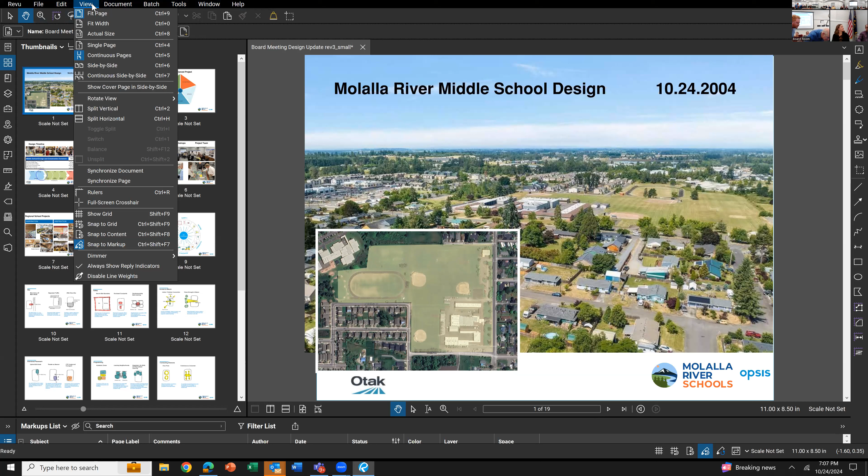And we're almost there, except it's not a presentation yet. This piece of software, sorry. Okay, let's see. View. And presentation. Hey, there it goes, it's gonna show up. Although it's all behind most of some of you, behind some of you.

Yeah, we all know where the school is, so we don't need to do that part. Okay, you want to start that off, Tony? You bet, and I'll give one more context here.

Certainly board members are aware, and most of the community probably are as well, but just to set the table: what you see in front of you are the commitments that were made in the bond language as we put the bond before the voters. That set of commitments was built on a lot of community voice that came over through the pre-bond advisory group. This language really informs the next step on our work with the architectural firm. You see safety and security, which was referenced earlier, is a top theme. Efficiency is a top theme. And of course, our primary purpose of teaching and learning, and within that, expanded learning opportunities. You'll see evidence of this work touching on all these here tonight.

I'll probably chime in at different points. We're all going to play off of each other because we've had different pieces of this, but at the end, or in between, if folks have questions, this is an open workshop, open work session. There may actually be a spot here later tonight where we're going to invite you out of your chairs too. So back to you.

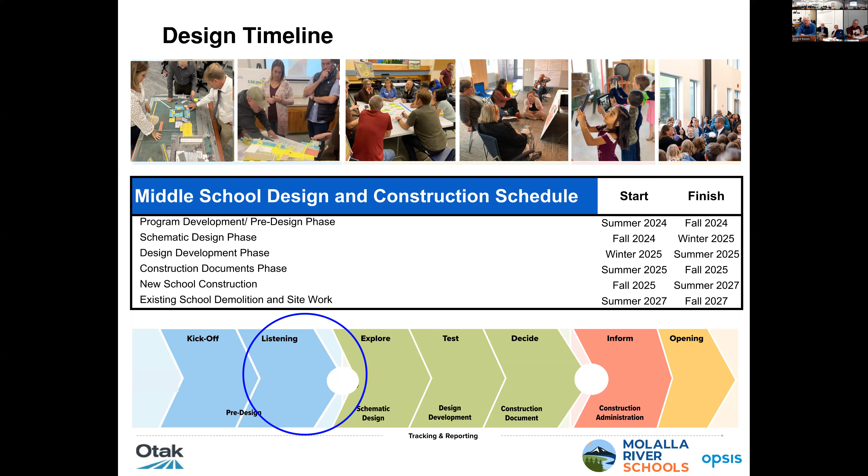Okay, that'll be noticed as a public meeting, not just public invited, so that all board members could attend. All board members can attend because it's a social event, you're not making any decisions, as long as we're not gathering a deliberating quorum to make decisions together. But do you guys all want to be there? Yeah. Just want to make sure that, you know, it likely will be most of what you're seeing. There might be a few changes, we're making progress every week, but by the 7th it'll probably be pretty much what you're seeing tonight. But it's always good to hear what everybody says.

Yes, go ahead with questions. I have one other quick question on your floor plan here. I'm just wondering about the black spot that appears here. That is a wheelchair space. Really? Yeah, so if you look really closely, every classroom has to have an ADA space, which in some cases has a different height or adjustable height table, or maybe a little wider, so we have to account for those things.

Incorporate that into the plan, that's what it is, good observation. And you're accounting for obviously possible growth.

That's part of the reason we have to take each room, put each chair in, each desk, so that we can actually work with Randy to say, okay, we have so many periods, how many classrooms do we give? We have 700 students, how many seats do we need in each grade? It's a big mathematical formula, it's actually quite interesting, because then you have the electives that happen.

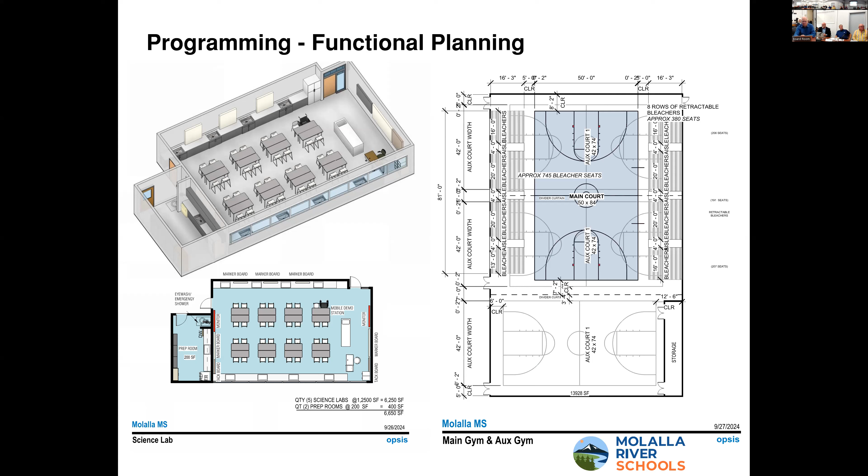So what does this process look like? It's right here in this room at the top. It's been very hands-on with this group, again, very intensive work. Even moving pieces around on a board to say, what if the classrooms were here? Where should the gym be in relation to, as Tony said, to get public access after hours? So again, every week we've been doing this work, and you're going to see a lot of the results of that here today.

Part of that is just trying to look beyond what you have, which is old. So part of that is we've been bringing examples of other schools around the area to see what are the possibilities in these different schools, what kinds of spaces are there, how are spaces changing over time. Since the original middle school, things are a lot different, libraries are different, cafeterias are now commons where there's more things going on than just eating food. So that's been part of this process to really understand what is a contemporary middle school look like.

And then Tony, why don't you talk a little bit about the tours that have happened?

So as Alex said, we've had the opportunity to visit and walk through schools and get a sense of nuts and bolts things. For example, what does the flow of traffic look like as kids are headed to lunch? Where are kids going to line up, and how many queuing lines are going to feed out to a point of sale? How does it fit within the cafeteria?

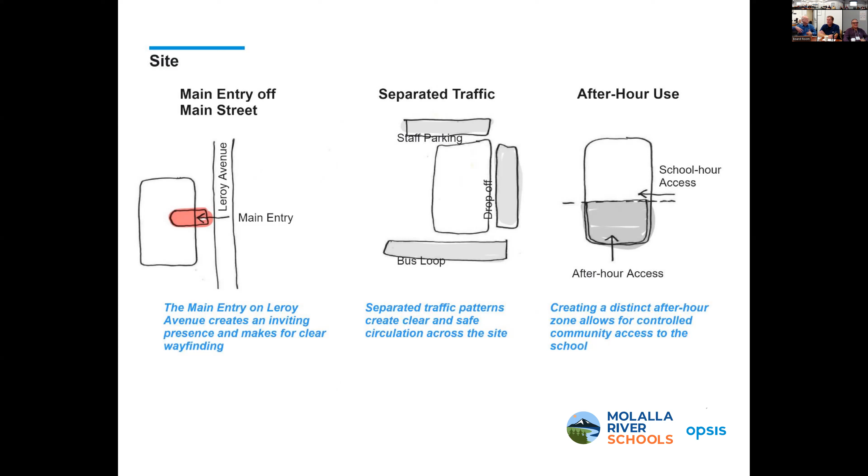That's why you really need to make sure the restrooms are in a secure area with the gym, because I've seen so many situations where we've got the whole gym secured, but then kids need to go to the bathroom, so we open up the doors to the hall and the whole security setup goes crazy.

So we need to determine, and this is a minor thing but still security related, how much do we fence around the school, and how do we provide good visibility? Right now there are all sorts of ins and outs with people driving through the middle of the school. So we're going to look at the whole site and hold a security workshop with a consultant who specializes in school security, along with our security technology folks, to look at overall security and the edges of the site.

One of the things we're looking at heavily in these concepts are enclosed courtyards. That allows certain activities to happen without letting kids wander off. We're looking at a concept, which you'll see a bit later, where we have CTE connected to a closed courtyard where students can go out and build something.

For instance, right now there's a game room being built. The construction project students are building it out in the area where the two covered play areas are, but it's open to the public—you can walk out there right now. Having a secure space for CTE to go out and build something and leave it there is a real benefit. So secure courtyards can be a real benefit to the school, and they bring natural light into the center of the school.

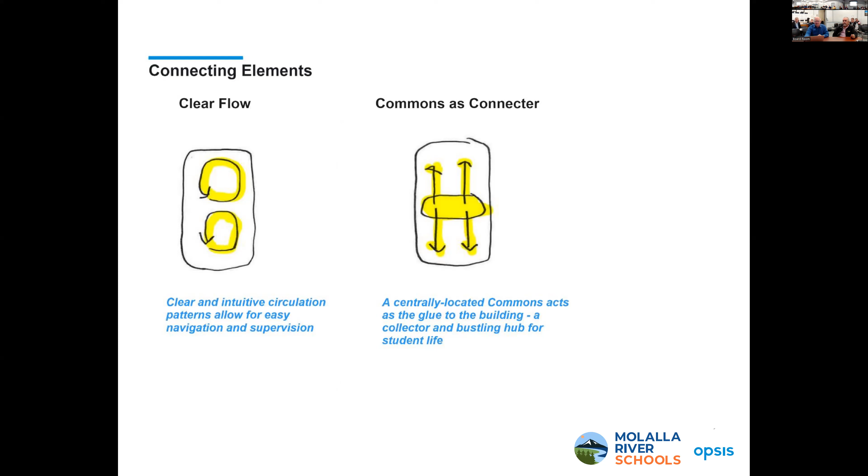Wow, that was your deep dive learning into the kind of stuff that we're dealing with.

Then we got to figure out how to put all of that together. That's been the fun part - probably in the last 3 or 4 weeks we've been working through a whole bunch of different ways of taking these neighborhoods and things like the library and the commons, the courtyards, and how they all get together. I can go into detail, but I can tell you we've come up with a number of different versions. We've spent time looking at different circulation paths - some that had more wings, some that had more loops, some with all sorts of different configurations.

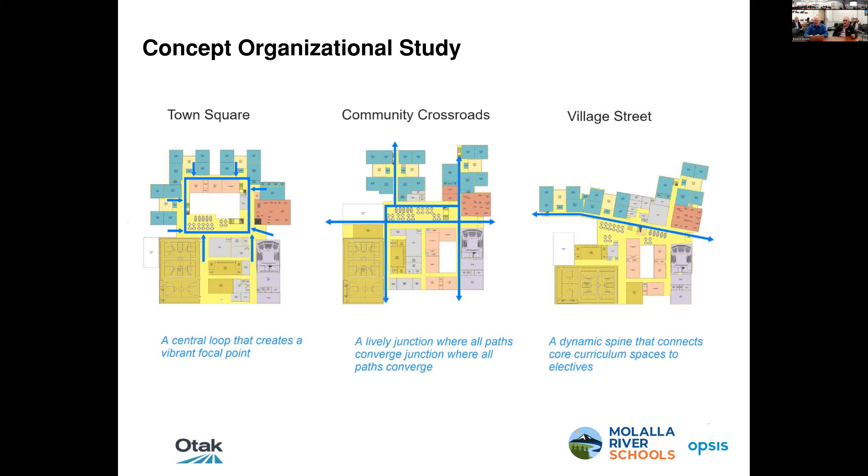What we've ended up doing is trying to look at those in terms of the site itself. How big is the school? You can see the existing school at the bottom of the page there and the new school - they take up a similar amount of square footage. But part of that too, you've got a lot of play areas and parking and everything in the middle of the building. So it's a little bit more compact, but it does take up most of the field directly north of the school itself.

And then we have all these other issues with parking, field use, everything else coming into play. So we have to work all the way from that desk in the science lab on one side to bus loops and everything. It's from biggest scale to smallest scale simultaneously to find that.

Has it been discussed about shrinking the footprint by building up? So we are definitely doing 2 floors for the academic areas. Otherwise the school would just get too large on the site. And here's the deal.

Once we bring all the buses onto the site, that takes up a fair amount of space. We don't want to lose much field space. So the compromise is - when we bring the buses in, how do we not lose field space? We have to take some of the classrooms and move them to the second floor. It's also more efficient construction for us to have, particularly the classrooms, in a 2-floor area. Other spaces - CTE, music - we don't abandon those, they're taller spaces. We don't want any classrooms above those. Obviously the gym too. So basically the classrooms we stack, all the other spaces we can put on.

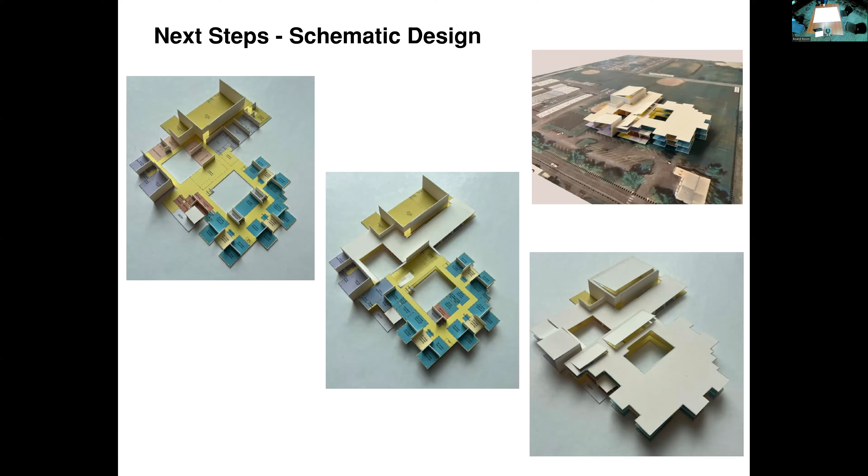Get this the right way. Okay, it's backwards, but that's okay. Depends on which way is north. I'm dyslexic, so it's good. Let's orient everyone. Daniel, could you enlarge the camera view on the table, please?

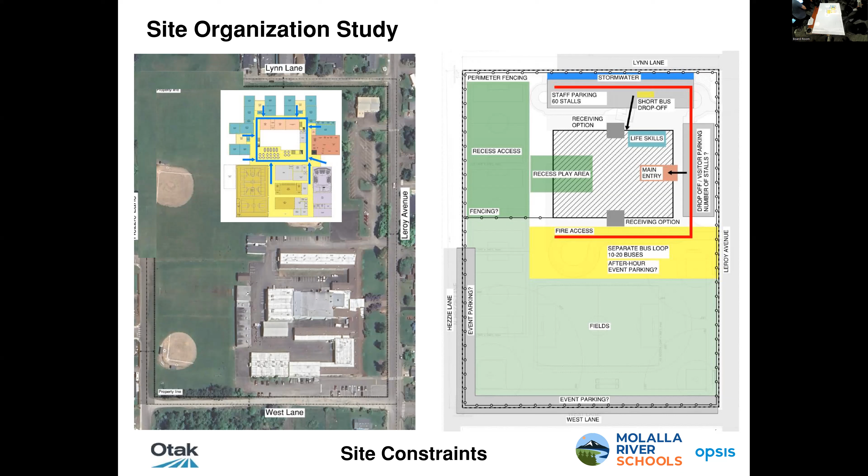Can you see it? Bob, do you see it? You want to stop sharing their screen? Please, thank you. I think you can see this. I was wondering, do you want me to just put on the profile with him? That would work too. Or do we need to stand and be out of his way to see this?

The camera's there, that's it. Right? Okay. But we can also take the phone and bring it closer. Go ahead and share, if you go on to the Zoom you can hit share. Let me do it, let's flip this around so it's going to be a double decker. Okay, so...

Okay, I'm on Leroy here. Main Street's two blocks that way. This is coming up here, we've got Lynn Lane. The existing school is sitting right here. So what we need to do in this process is bring buses in, loop them out, and come out. We think it's probably going to be here in the middle of the site, but we don't know for sure at this point.

We're looking at buses coming in, looping in and coming out. We're looking at some kind of staff parking, and a drop off where you'd come in, drop off, visitor parking, and go back out. We're trying to separate the distance between where buses are coming in and out of the site off Leroy, and where cars are coming, so they might line up this way or here. Then we're trying to preserve as much field space as possible around the school. What you find out quickly is when you put all those things together, what seems like a giant site gets small.

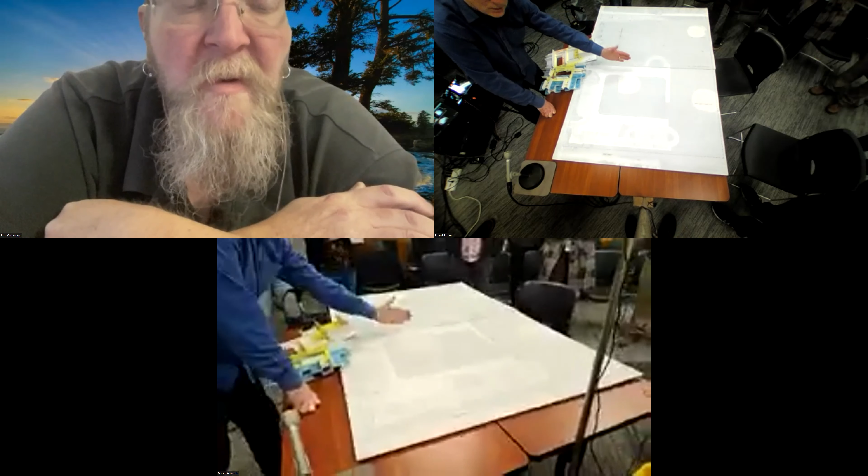We also have a very clear line, right about here, which is the existing building. We can't build there, obviously, since we're leaving that building operational while we're building this. So everything south of that has to stay as it is until we get this built over that summer. Then we can tear that building down and build the bus loop and build those fields.

Are these right here walkways, like sidewalks? Not really, not even yet, we're a little too early. You can see this doesn't actually fit on here because the bus loop has to move. This is in-process work, but it gives you an idea of something we've been thinking a lot about.

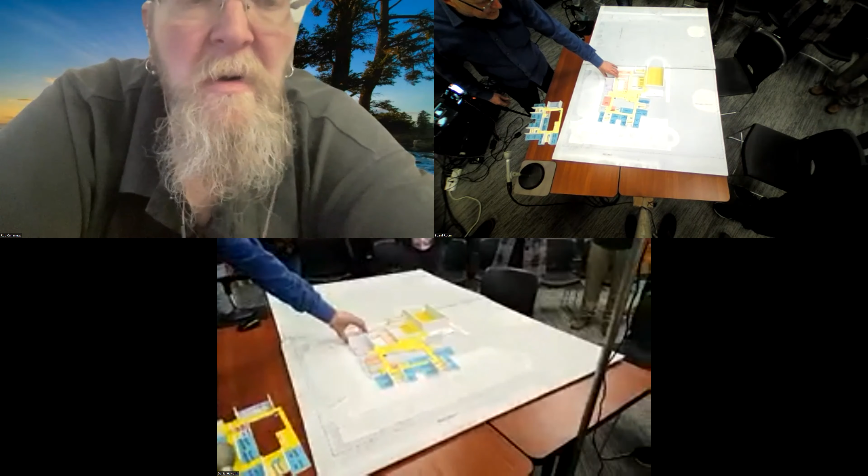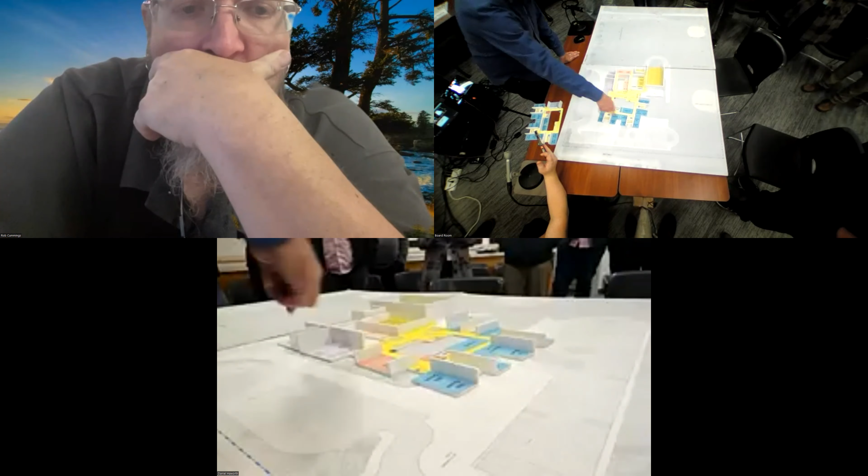If you were coming from Leroy here, this would be the entry. One of the things we talked about is, can you look straight out to the west toward the track and the elementary school and across the fields? That's where this commons would be, in the center. You can see this idea of a loop here, it's really a double loop, almost like a figure eight. Anywhere you go here, you can loop around without hitting a dead end.

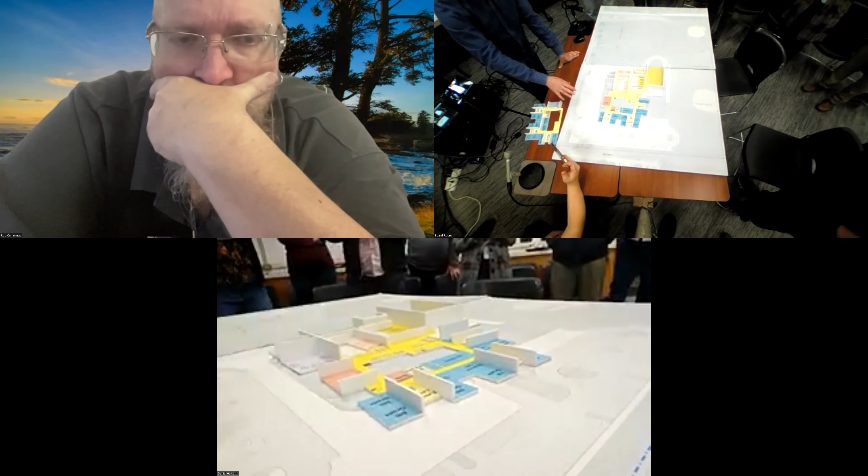In this program we have the theater and music up front, administration at the front door. That's standard practice, a secure vestibule. Then we have these neighborhoods: neighborhood 1, neighborhood 2, neighborhood 3. We have life skills here in the center. In this scheme we have two courtyards, a kind of lunch courtyard and then a CTE courtyard, so this might be where kids are building things.

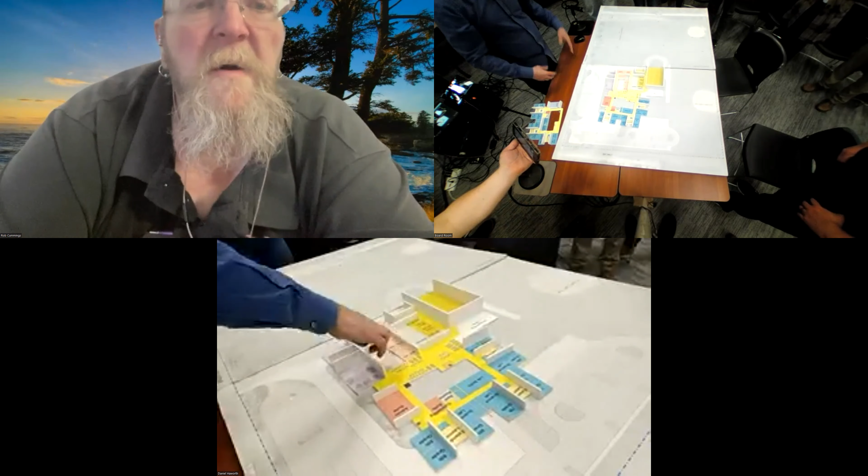They might be doing robotics out in the courtyard, or 3D art. We've done a school where we have ceramics and a glass garage door, so you go out there and do some sculpture or whatever you're doing in art, out in that courtyard. This would be more like a lunch courtyard, with some tables out there, again secure, not students out there unsupervised. Then this would be active playground space outside the building.

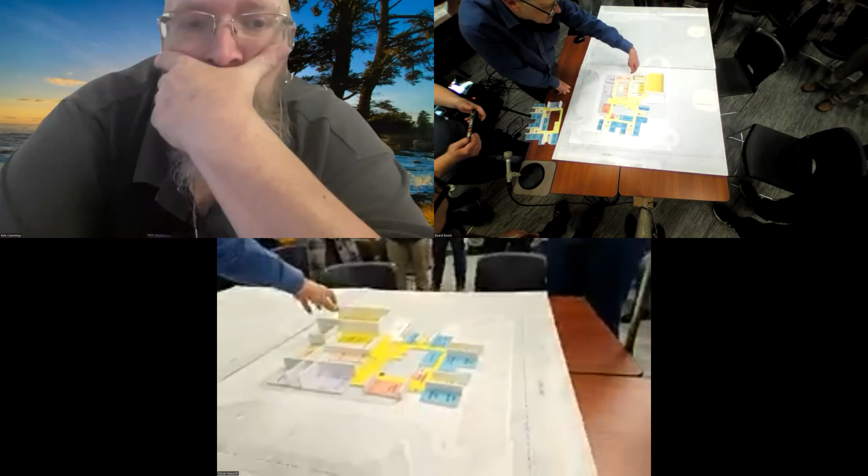In this version, you can see that if we did have a drop off — let's assume it's placed a little differently on the site — you might have a separate entry here for the gym. We could close the building off here and here, and you'd have the restrooms, the locker rooms, the gym, and an entry.

That would be the smallest and most secure zone. So you could come in and we'd probably put some parking in here. After hours, you could park. If a team was coming for some kind of event, they could bring a bus in here. You could actually get in and use this gym without getting into the rest of the school.

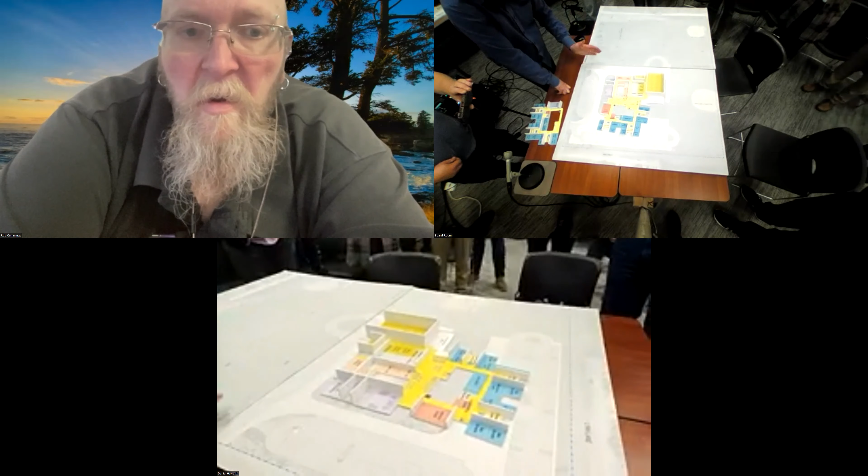The next secure level, when you talk about where that might be, is you might then have some doors here and here. So you can say, well, we're going to do an event in the theater. We're going to leave the main lobby open, we're going to let the gym be open, then we could secure this area off from the classrooms. So these layers of security are really important to think about so that we don't have to open the whole building up.

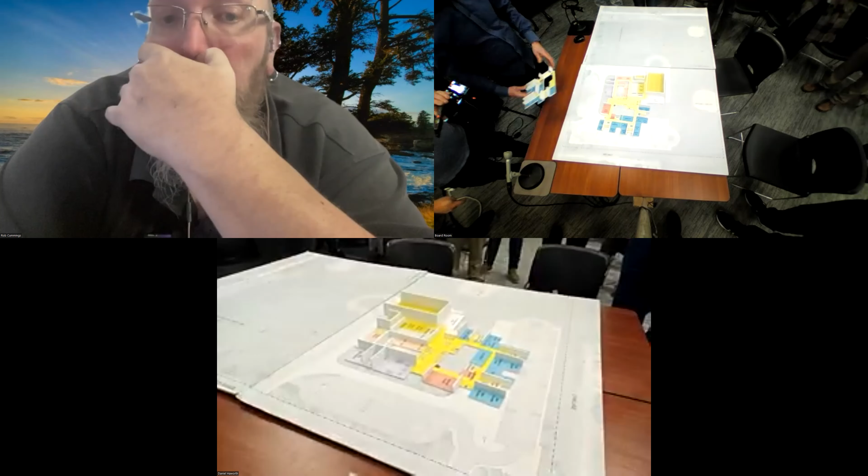Then you can see looking at a second floor here, so I get this right, again those neighborhoods stack on top of each other. And you can start to see how this common space works.

One of the things we talk a lot about is where could Randy stand in the morning? Like right here, you're coming in the door, he could be there. And a lot of our principals we work with over and over again say that's one of the best things of the design we work on. Where can I stand and see the whole school? Where can I feel like I can see everybody coming and going? And where is that happening? It could happen inside the door.

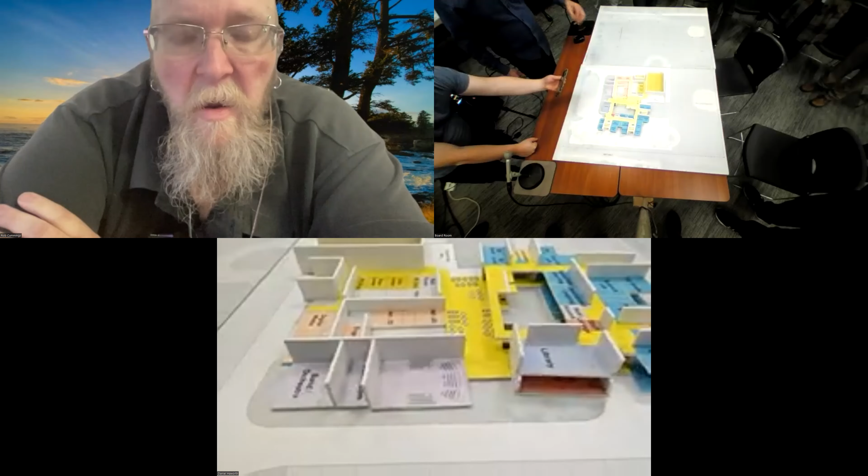You can view the neighborhoods, you can view the CTE out toward the play area and have a sense of everything, which is completely opposite of what he has right now, which is I have no idea what's going on beyond down on those wings. Those wings are out there somewhere else, you've got to be moving through the building.

And so this is where we're kind of at right now. It's a concept, it's still very conceptual, but I think everybody's pretty excited about the way it's working. We're starting to sit on the site and kind of look at some of the concepts about how the pieces come together. So with that, I'm going to stop talking and let you guys ask questions, poke your head in.

If you want to, you can also get down. I do have some roofs to put on it, but they're really just preliminary. We don't really know what the building looks like or what the roofs are.

Just notice that you've got each grade on both floors. Actually, we labeled them that way, and I've been meaning to actually take that off, because it could be that this is sixth grade and sixth grade, and then seventh and seventh, and eighth and eighth. I don't advocate for one or the other, it's just interesting.

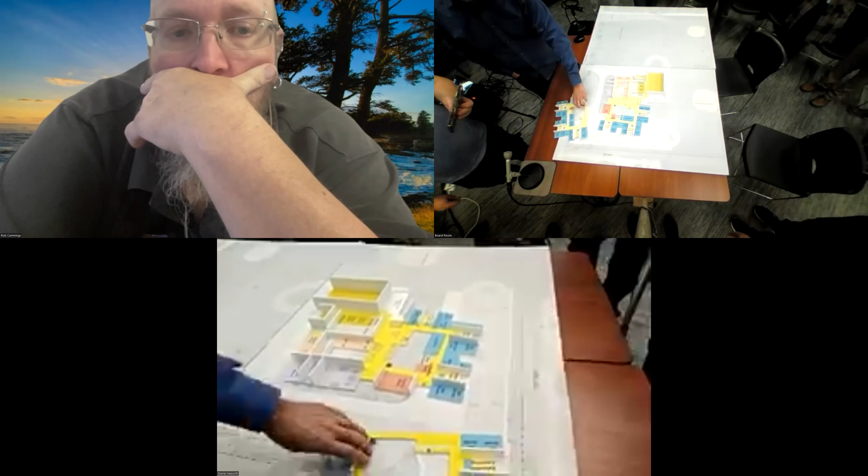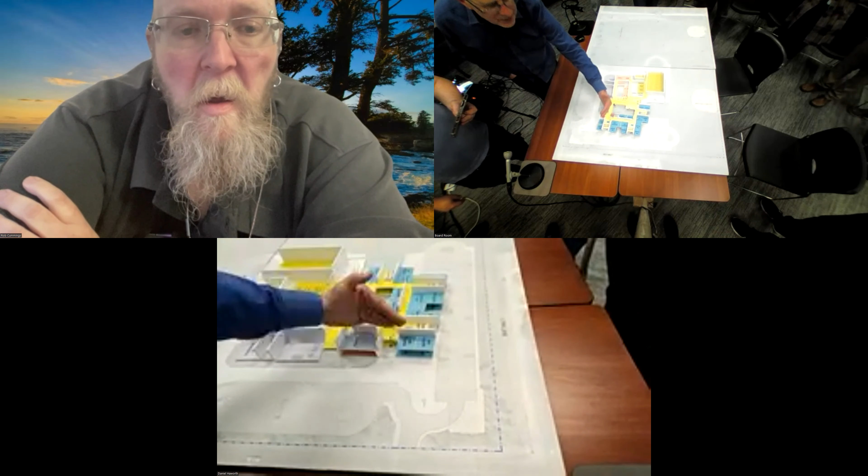Is there a reason for them to stack vertically so they're really close? This idea is that sixth grade is here on 2 floors, and then this is seventh and eighth. So kind of this side is sixth grade on 2 floors, and there's a stairway right here.

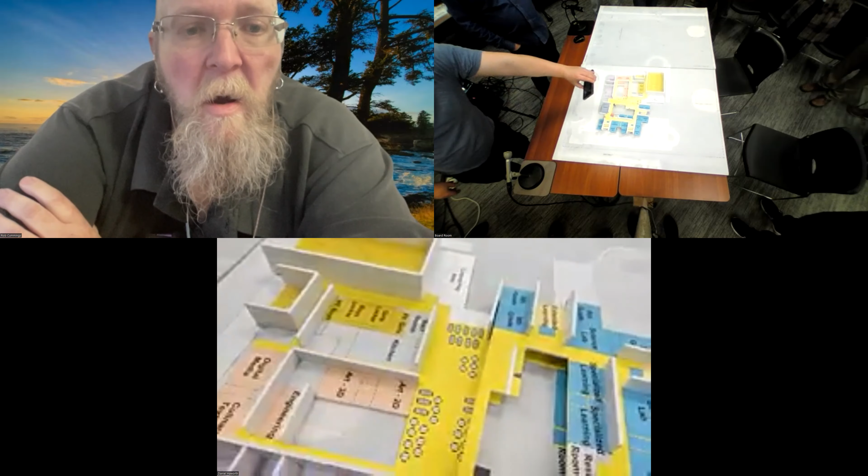One of the things the loop circulation does for us is address a little intricacy of school planning. You'd like to think that every grade is the same number of students, but it isn't. The population goes up and down depending on your grade level and your enrollment. So some grades are going to have, potentially at some point you could hit an enrollment growth where all of a sudden you need one more classroom. When you have wings, that's a little bit of a problem, because all of a sudden you need a sixth grade classroom in the seventh grade wing, which is outside and around.

So that's one of the advantages of the loop, is you just go one more classroom over, and one of those classrooms could become a sixth grade classroom. And then as that bump of school population moves through, that could move back to a seventh grade or eighth grade classroom.

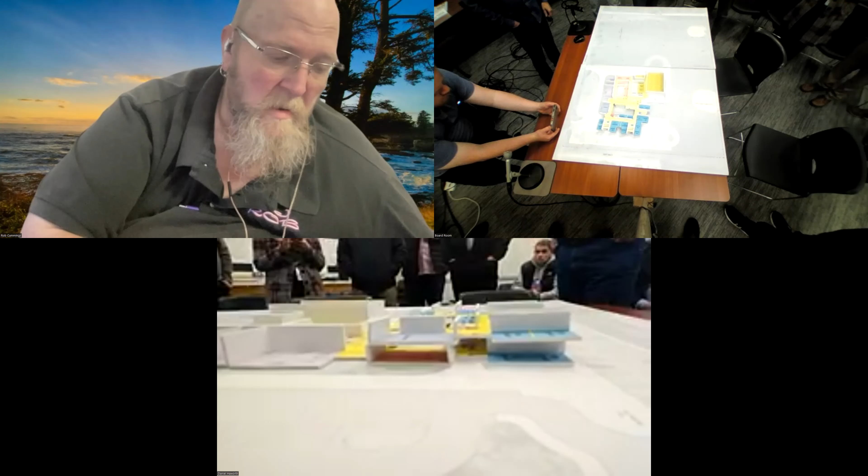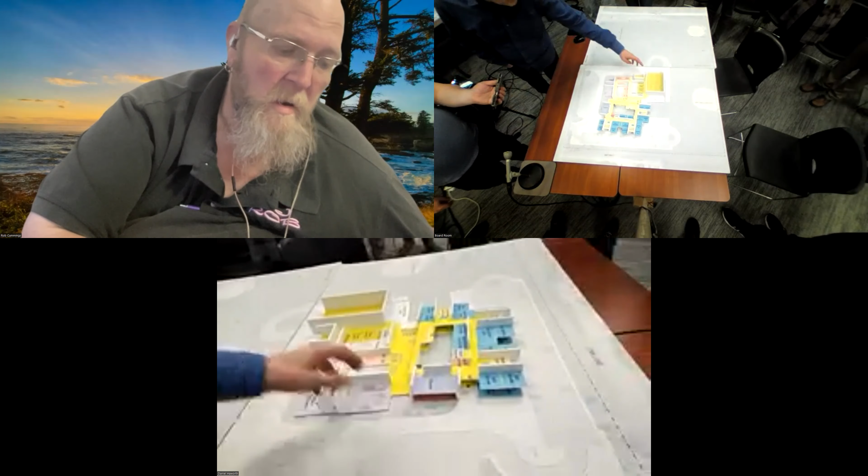So for the entrances, there would be one gym entrance here at the main entry, and then this would be more of an exit out to the playground. And there might then be a staff entry off the staff parking lot that would be just a secure sort of back door card-swipe kind of entry for staff. But really trying to get it hopefully to 2, if not 3 main entries, so there's a limited number of secure points.

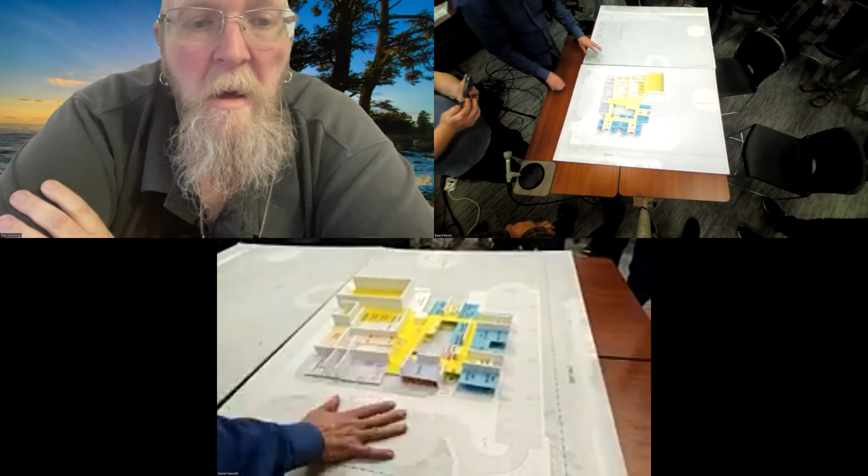So I have a question about the parking. Your biggest parking lot is over here, and I understand that's staff parking, but what goes on in the evening when you've got events here and here? There's probably gonna be more parking, it's not shown yet. Imagine at least this lot probably here. One version would be you actually run the bus loop around a parking lot, which is often done, but we haven't really gotten that far.

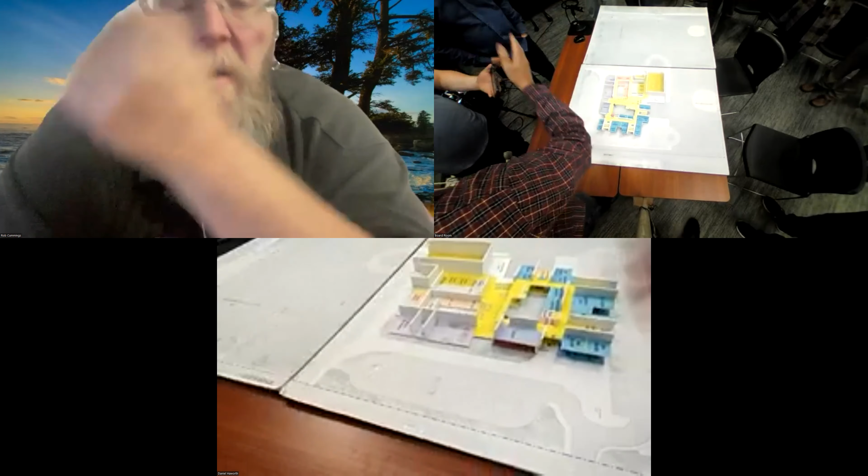This is the minimum parking that would be required. All other parking would be how much more do we want to put for community use? Whatever you don't put somewhere here is gonna mean people lining up down Leroy Street, and they're probably gonna be doing that anyway because you'll probably never have enough parking on the site. This is about 100 spaces, and we were thinking if we put another, say, 50 or 60 here, we'd be at 150, which is more or less the number of striped spaces now.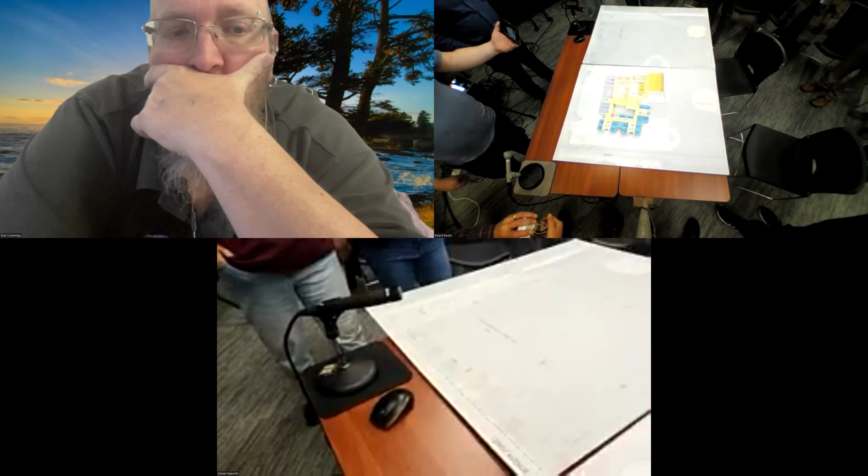Now, there are a number of places right now, well, you see right here, where the road is kind of vague on the south end, there's no striping. So there's a lot of spaces to park now that aren't actually striped parking spaces. If you count all of those, you might be able to get up to 200 cars on the site now.

But with the bus loop, and with fields down here, and the school's all torn down, and this is done, you got fields down here, would there be parking down there as well? Well, that's the question. Do we put it here? We probably want to concentrate it close to the school, because people don't want to walk that far. That's the disadvantage across the entire thing. So what we probably do is bring the fields as close to that edge as possible and bring the parking probably here, or we might build this down a little bit and have more parking there.

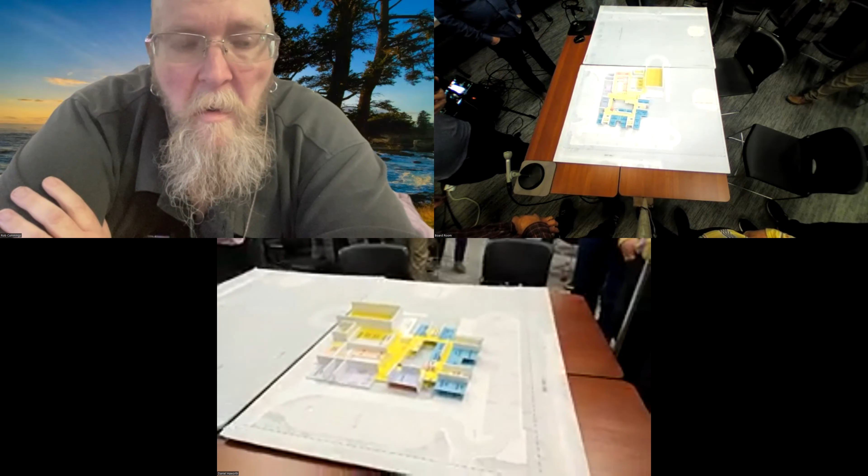That's where we have it. I feel like the more parking the better. That's something that the city doesn't take into account. That's why every neighborhood, you can't drive through your own neighborhood because the cars are all parked on the street. Then it's the balance, like how much field space do you start to take versus parking space? That's the park space.

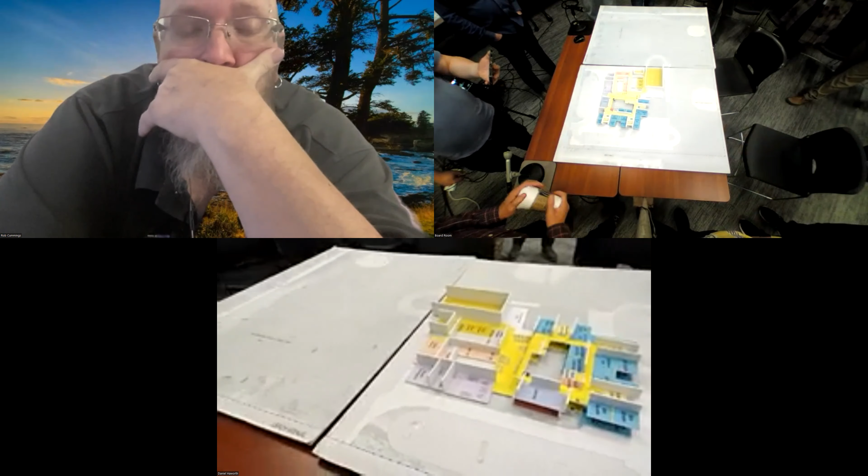I like the idea of putting some parking near those fields. Well, yeah, and near the gym and the theater as well. Nobody wants to walk all the way around.

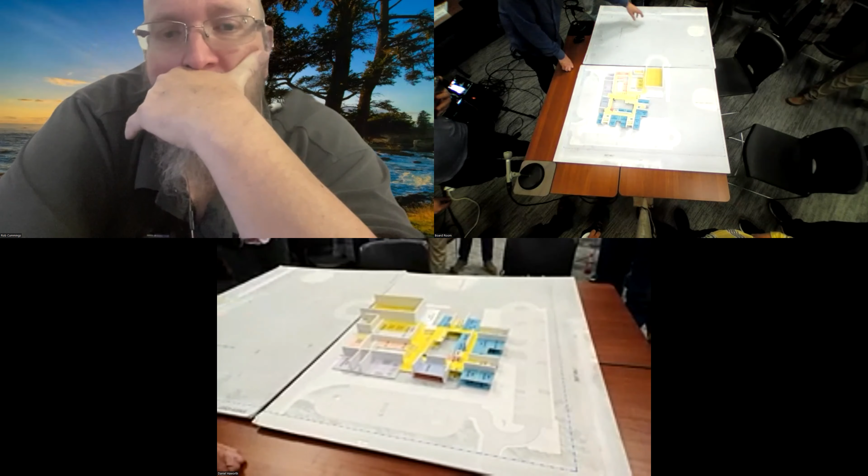We haven't been there obviously like you have, but what we have seen is the majority use of the fields is like the weekend, there's the Little League or the sports clubs. That's when the fields are really getting used. So if you're gonna sit there in your car, I understand that people, like this is the back there now, people park right where you can park and look out at the field. They probably, some stay in their cars while they're looking at somebody playing out in the field, but that ability to have some visibility between your car and the fields is a good thing.

I like what you said, Alex, that this is still conceptual because it looks pretty darn done. Yeah, I know, and also I like your word aspirational. We're still in the aspirational stage. You don't fall in love with it, oh, now I understand what the design is.

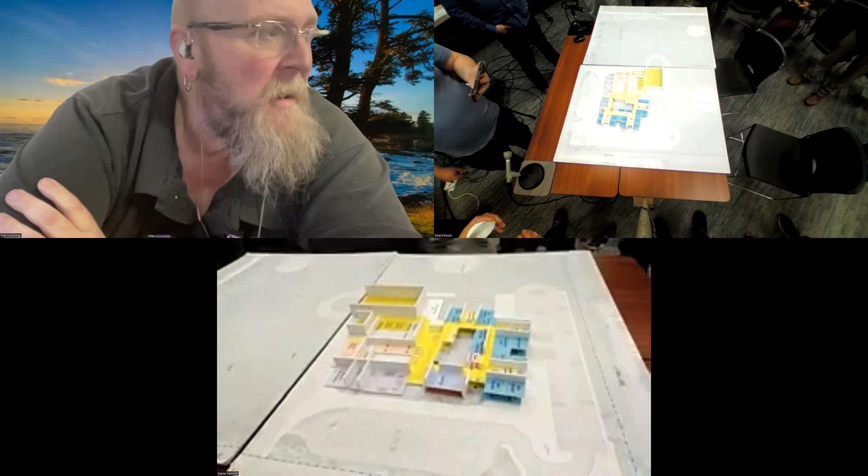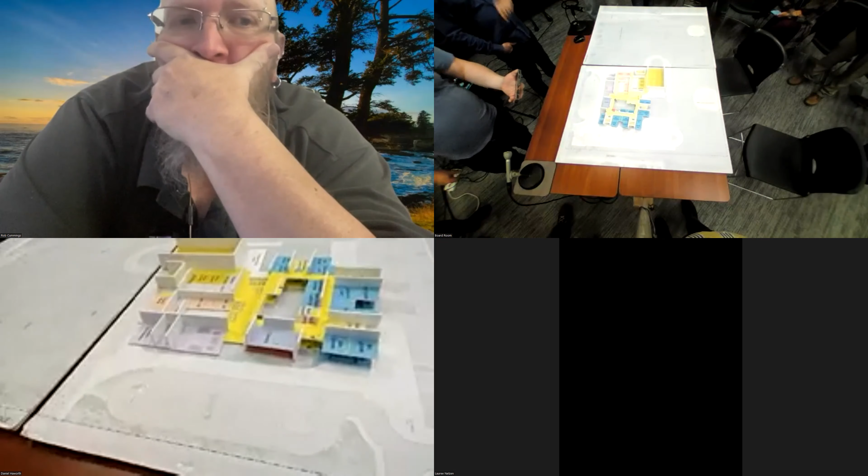We're not done. It's literally, well, this version is a version that came out of our work session on Tuesday. It was remodeled yesterday, the model was made yesterday for today. So that's the speed at which we're moving along, just to make sure we're getting to the point that we have a concept that we can start to put dollars to share with all the community. This is kind of a vision, it's not a design yet.

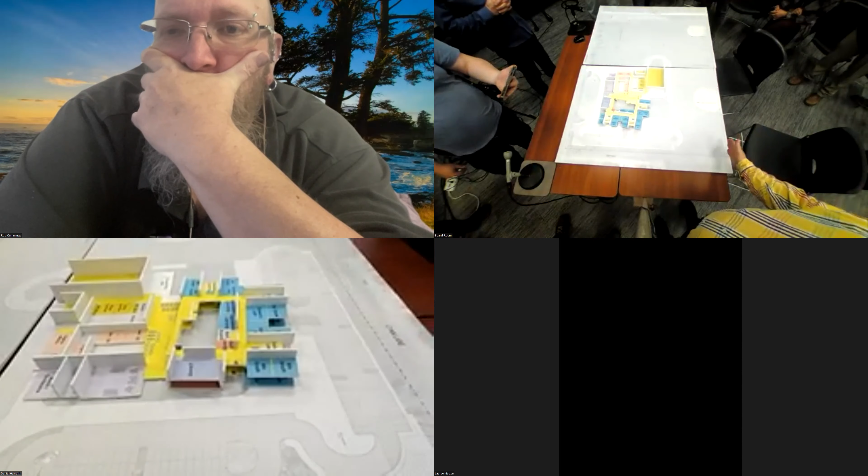Clarify, at this point it's still just within that boundary of the right of way on Hezzy Lane that theoretically could go through. We could build over that because it's actually a right of way, so we're right up to within an inch of it. Where is Hezzy Lane on this thing? It's right over there, and it stops right about this point. Okay, all right.

And then you can see here where Lynn Lane ends right here. It's interesting, the stereo is a little distorted, but Lynn Lane isn't nearly as wide as it looks. The right of way is wider than the actual road.

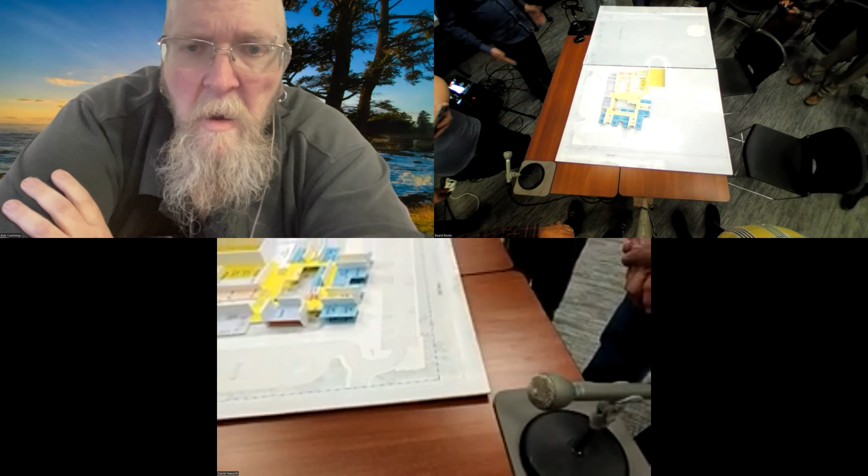So where is the elementary school itself? Right about where the chair is. Oh, okay, all right. We're getting close, maybe at an angle.

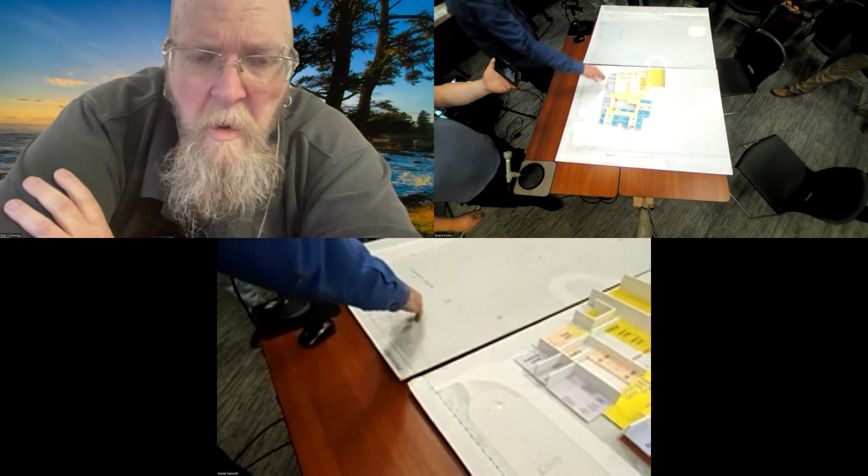Where did you say your points of entry and exit are? So this would be right there - here's your existing front doors right here, by the grove of trees, that's your front door. So this would be the front door here. Essentially, if you were in the parking lot, halfway down where that parking lot does something strange, two things coming together, that's about it.

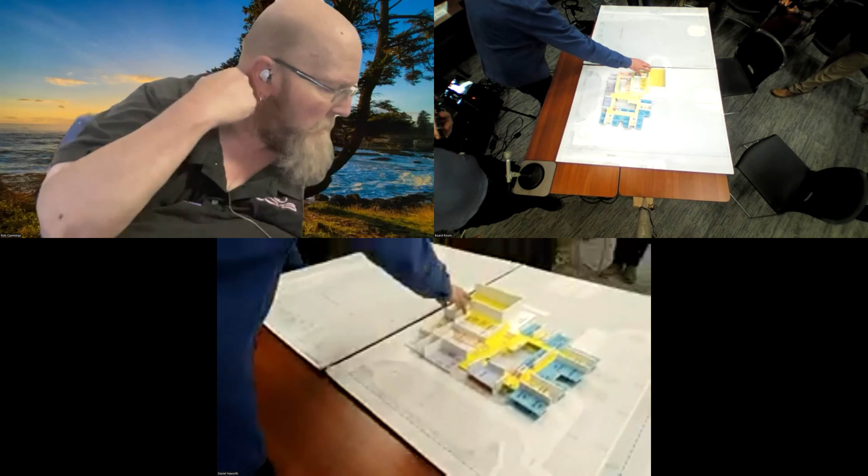So you've got 3 points of entry and exit, or are you going to have 4? 'Cause one is the main entry, one is the after-hours gym entry. This would be not an entry - this is access to the playground, essentially recess - and then a potential staff-only entry, potentially on the north side. Is that really going to be the extra exit, for fire or anything else?

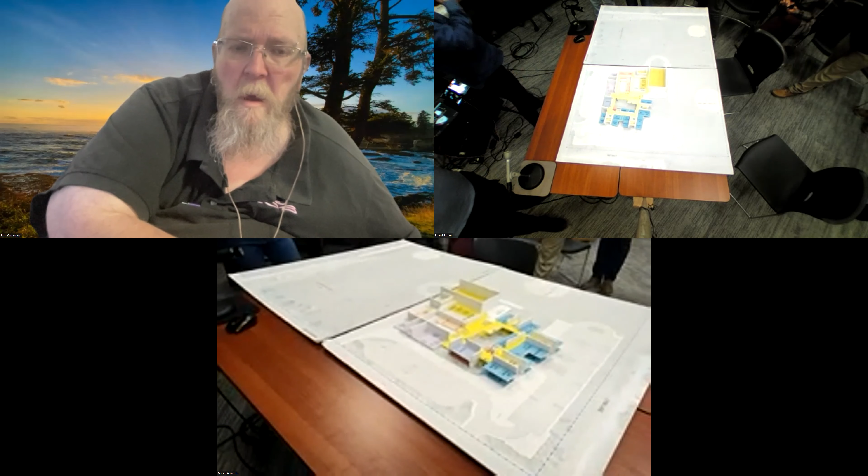Every door we put in a school will get propped open. Even though we put an alarm on it, they'll get propped open with so many kids. They're fairly strict on those. Well, I know that, yeah.

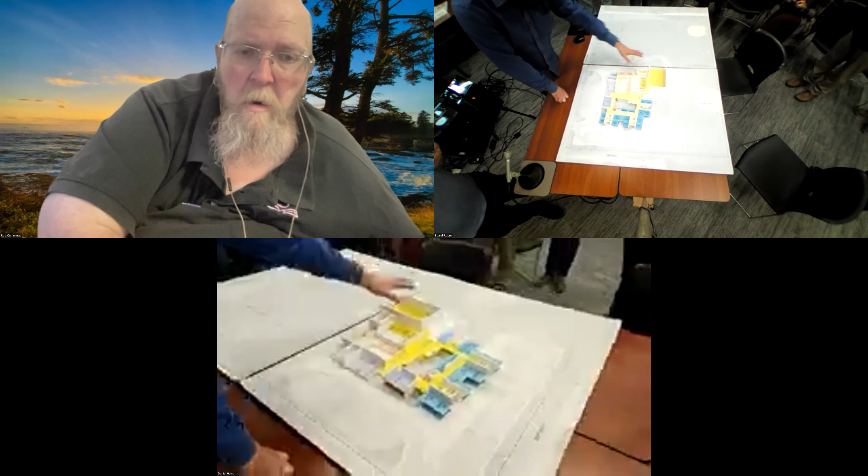It does have to be held to those standards. The gym, for instance, will likely have exits directly because it has to be designed as if you packed it with people. It's probably going to be code that there's like 1,500 people in it, but 4 exits - probably 4 exits, yeah. So it's going to have some doors which also could get propped open too, but the gym just has so many people, it's going to have some sort of exit doors on it.

And so for road access, I know we're having a problem in town now with the building going up on Illinois and all of that. There's not going to be anything at this time because it's out of season, and they won't do the asphalt and stuff. So are you going to make sure we don't run into that problem too? It's kind of huge over there.

Yeah, so the way - I don't know, Steve, why don't you talk about the schedule? So it's after October or something like that. So the contractor will develop the procurement schedule and construction schedule. Typically, one of the advantages of the way this is being done, relative to building on the north side of the site, is that as soon as school is out, we can tear the old school down.

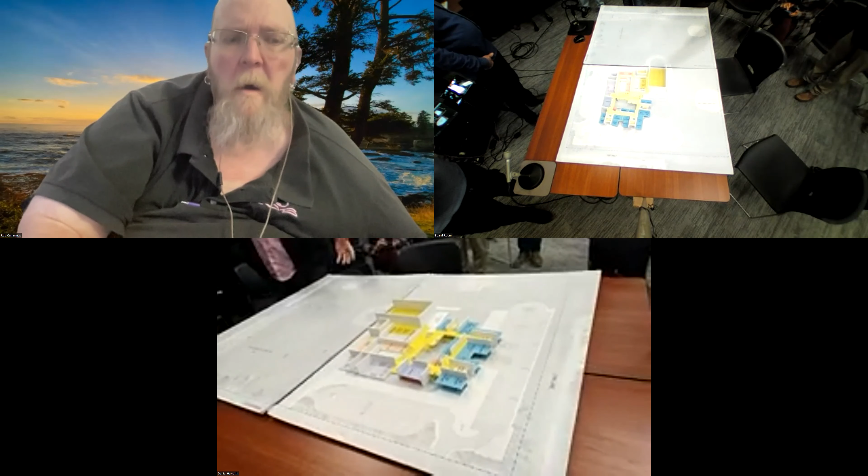And at that point, you can spend that summer, when you've got the weather, to do a lot of the paving projects, when the asphalt batch plants are open - because like you said, I think they just closed last week. Yeah, it's turning into a really big problem. There are ways to get asphalt during the winter, but it's expensive.

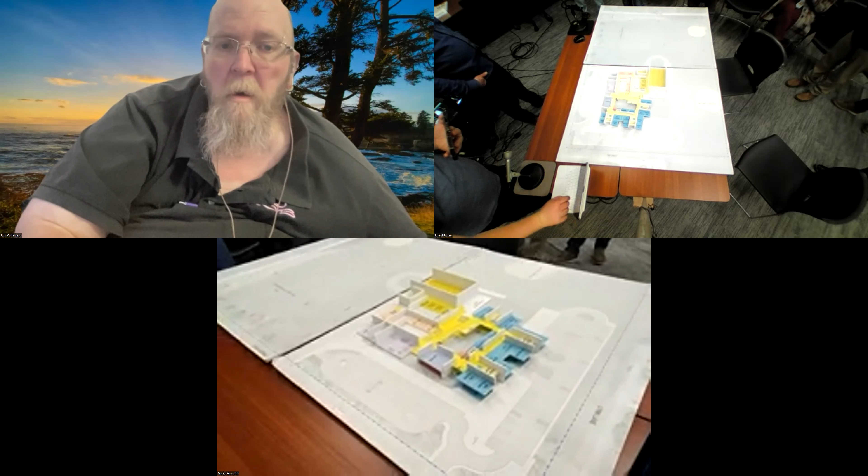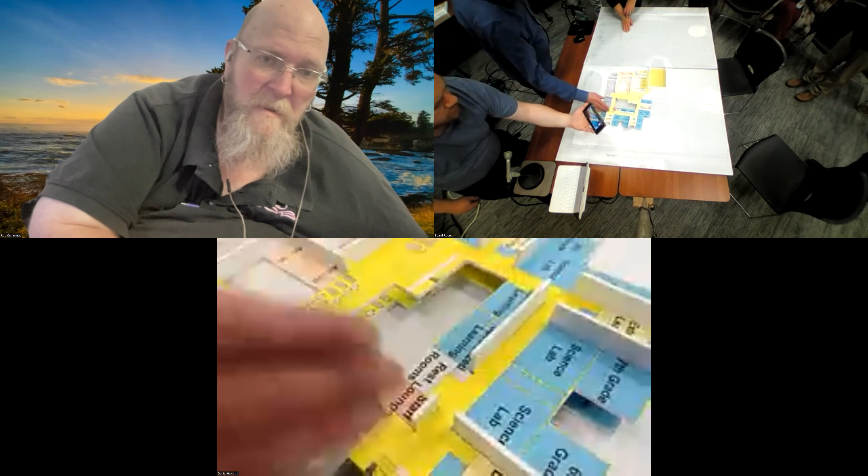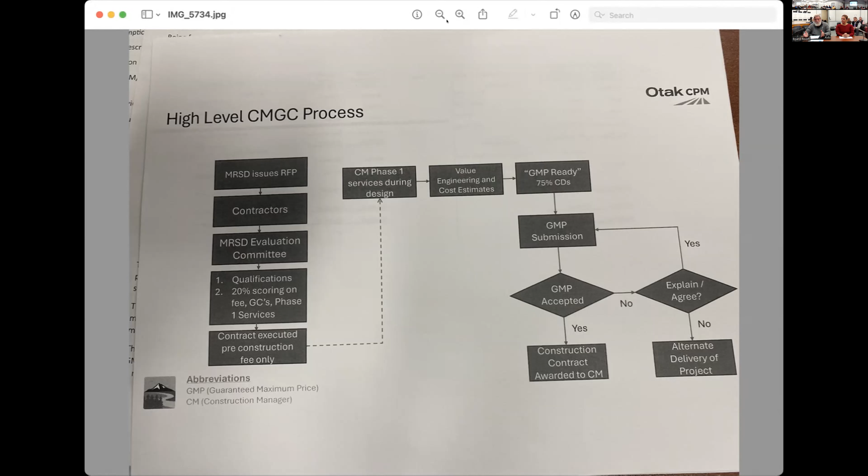There's value engineering - that's where the architects design at 100% design development, and an estimate goes out and says we're 5% over our budget. What are we going to do to deal with that? Are we going to change some of the material? Are we going to change the design of the building a little bit? Whatever that is, that's a big part of the value of them being part of that.

Certainly their expertise in building projects - they're builders, right? We're project managers, they're architects, they're the contractors. So they can find stuff in the design and come up with maybe a better way, a better mousetrap, a better way of doing it.

One of the great advantages of having the CMGC is they are truly a partner with the district. So when it comes to public safety, they are more vested in following what the owner, the district, wants to accomplish than if you have design-bid-build, where it can be a little confrontational, because they're trying to do the project and get as much money as they can.

In CMGC process, they get a fee for all of the work, and they don't have an opportunity to make the kind of money you can make in a design bid build. Somebody could make a lot of money, or somebody could lose a lot of money in that kind of process as well. The CMGC is a bit less risk for them than the hard bid project or the design bid build, but they do have some risk.

And that's where we have them providing that guaranteed maximum price at the 75% construction documents, because we want them to be very involved in all of the value engineering and design topics, because when they have that GMP, they have to meet it.